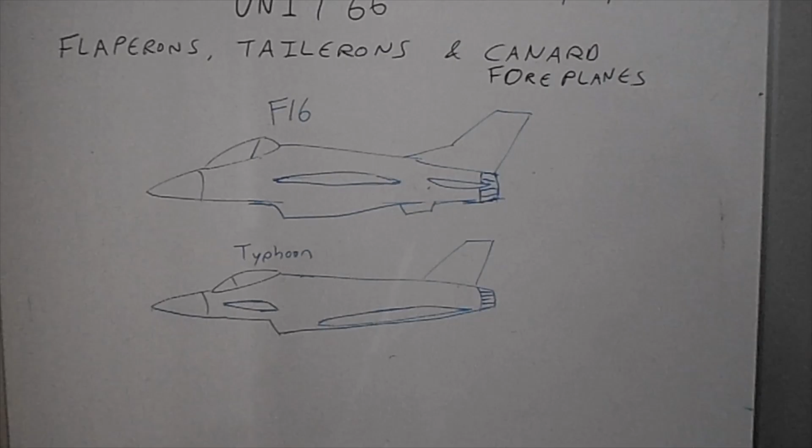Okay, so this is a dedicated lesson on Canards, or Canard foreplanes, as fitted to the Eurofighter Typhoon, the Rafale, the Saab Gripen, the Su-37 Terminator, and the Chinese J-10, and some other aircraft. NASA had a quick go with them on one of the X-planes to see what they'd do for the Advanced Tactical Fighter, but they decided to go without canards and went for vectored thrust instead. The Su-37 has both vectored thrust and canards, but it's a big heavy fighter, so it needs that surface area and extra thrust to turn it around.

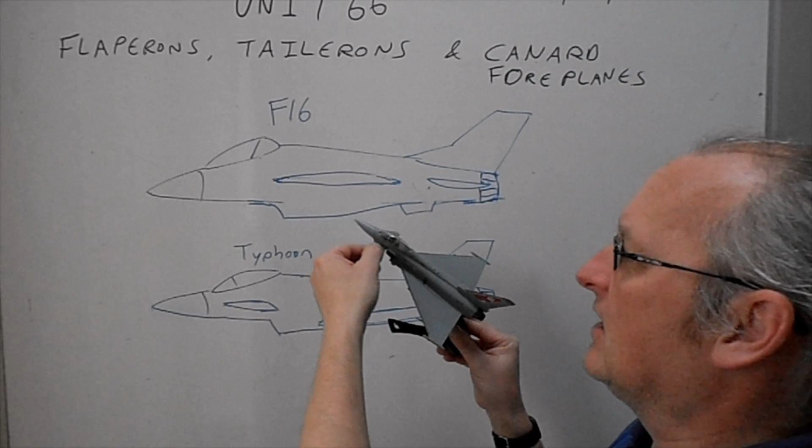Right, so canards, basic introduction to them. The canard is this bit here, which is the foreplane. So you have the main plane and the foreplane. It is a plane in front of the wing, right?

And I'll talk a little bit about the advantages. Your criteria is about the advantages of canards. There's a lot of website activity out there, a lot of YouTube videos. Basically, people that like to talk about jet fighters get a little bit polarized. The American ones are in love with the F-22 and the F-35. They will defend that to the hilt, and stealth's super important and things like that. And then other people are saying, well, it adds extra weight, it's not very dynamic - a Canard Delta configuration is better, and things like that.

So the Eurofighter and the Rafale are seen as being a generation behind the F-22 because they don't have stealth. And those aircraft were designed in the 1980s, before stealth became a widely recognised thing. Stealth isn't the be-all and end-all of everything, and those aircraft are very expensive and can hold their own in a dogfight with any aircraft that has stealth capabilities. Stealth is of limited use, of no use whatsoever in a close-in dogfight because you can see them. I'm not going to go into a big long diatribe about stealth versus canards, because if you could design stealthy aircraft with canards, you would.

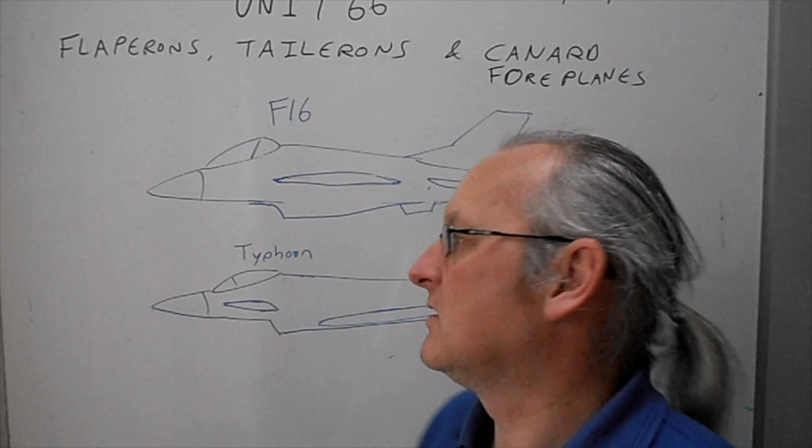Okay, now I'm going to compare two aircraft here: the General Dynamics F-16 and the Eurofighter Typhoon. The F-16 and the Typhoon have your standard configuration. This one has a taileron, but for now we're going to concentrate on the fact that they're both all-moving surfaces. So the canards and the tailerons both move up and down, right? There's not like a little elevator at the back. There was on earlier aircraft that had canards, like the Saab Viggen, okay.

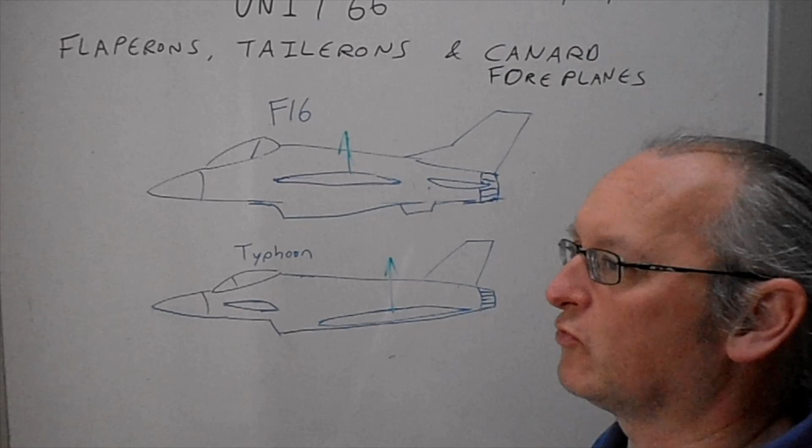The Typhoon has what we call close-coupled canards, more on that later on. But one of the advantages of canards is, if you think about what's happening on the tail, right? So we're going to draw positive in green, so we've got some lift. That lifts the aircraft's weight up. The lift here is coming from the wing. Most of the lift on both these aircraft is coming from the wing. Now, some purists will say that the Typhoon doesn't have loaded canards because it doesn't actually support most of the lift. So pick another aeroplane with canards, doesn't matter which one, we'll talk about that.

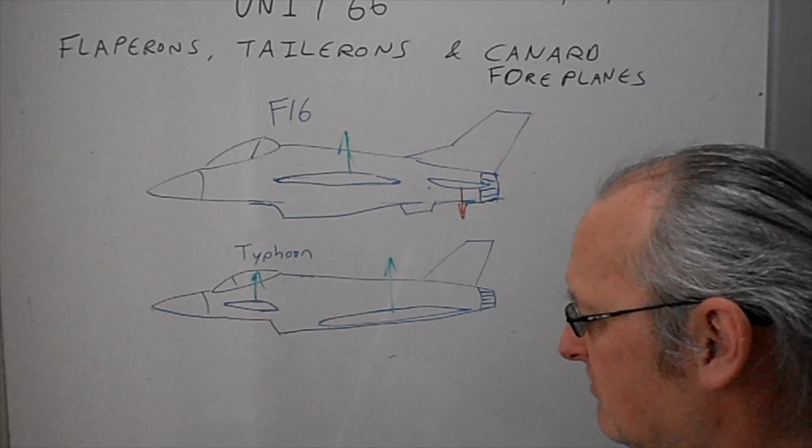So the canard is providing lift in this direction. Now, the taileron, or the tail, is providing downforce in that direction. So the first advantage of canards is that - and remember, in engineering and aerodynamics, you don't get anything for nothing. So I'm going to draw a negative effect here, which is what we've already talked about: if you've got a surface providing lift in any direction, you are producing induced drag.

Okay, you can't get away from it. You can put winglets on, you can do whatever you want, but basically, if you make lift, you make induced drag. So there's a drag penalty for making lift. You've got to make lift.

We're making so much lift, and however much lift you can make is how much weight you can lift. So all of the lifting work here has been done by the wing, and this is just providing a pivot to balance the wing out. On this system, on the Typhoon, everything is being lifted up by the wing, but also the canard is helping to actually lift the weight.

So if you're trying to lift a 20-ton aeroplane, here you've got to create all 20 tons on this, which creates a lot of induced drag. You need all 20 tons here. Here you can split the drag between two - you can create 18 tons here and 2 tons of lift here. You've still got your 20 tons of lift going up. What it means is that the canard, which is creating induced drag at the front, is also providing you some lift, whereas the tail at the back that's creating induced drag is not providing you any lift. So that's one advantage of canards - all the lifting surfaces add towards lifting the weight of the aeroplane up.

Right, other advantages of canards then. Going back to this, we'll just get rid of all that bit there.

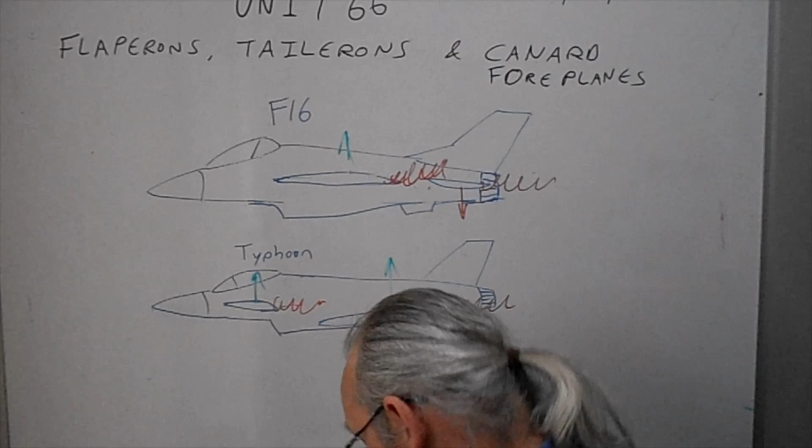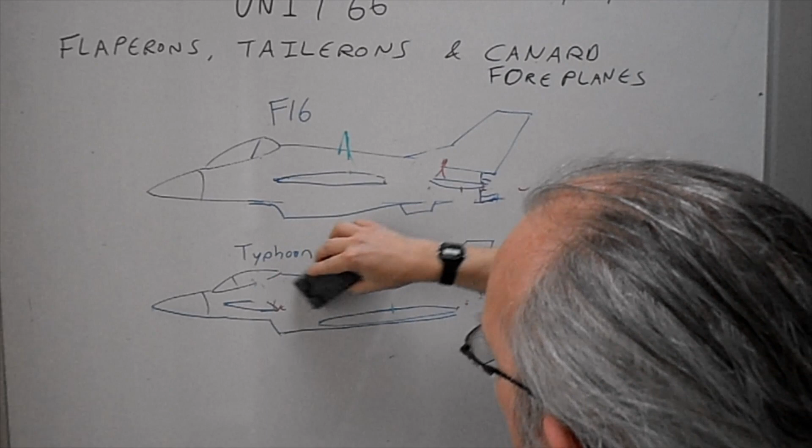Let's look at air combat manoeuvring or dogfighting. So in a dogfight, we've got the Typhoon and we've got the F16. The F16 wants to change direction. There's the back end of your F16, your bogey aeroplane is over here - make it anything you want. So that's the bad guy, and this is the good guy.

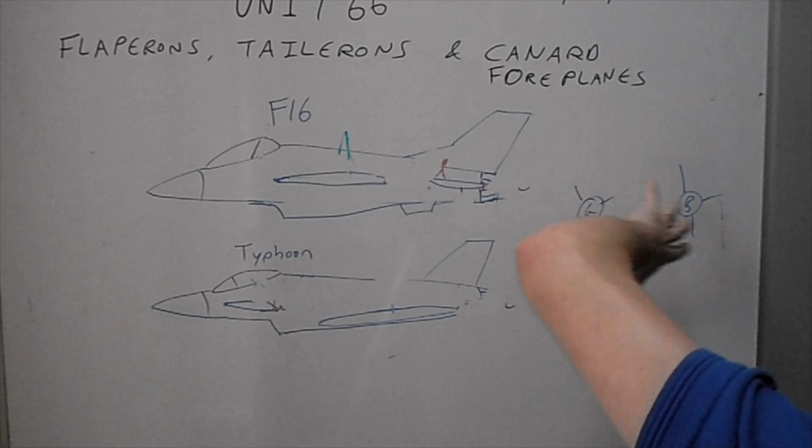He wants to shoot down the bad guy. He has to turn his aeroplane or pitch the aircraft in a turn. It's mainly the tailerons that can do all the work here, pitch the aircraft round in the turn, create extra lift, and get inside that turn - point the nose of his aircraft at the bad guy in order to shoot him down.

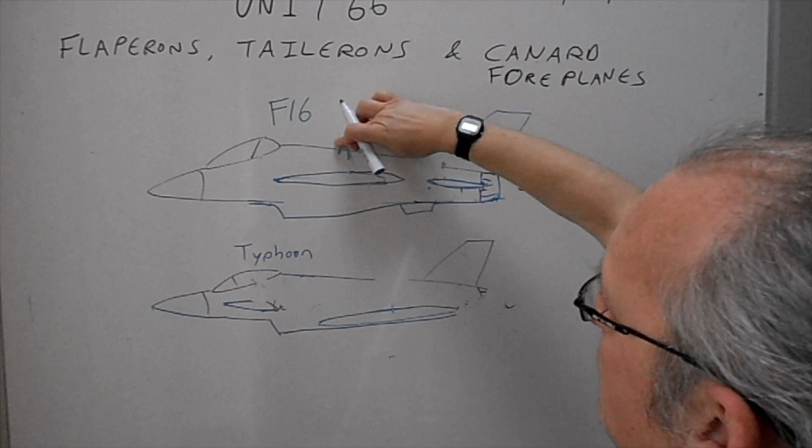With the manoeuvrability effect here, what we have is the wings do most of the turning force. That's creating, remember from our forces in a turn lesson, all the centripetal force to turn the aircraft, pull the aircraft. Centripetal pulls the aircraft into the turn.

What's creating that extra lift is, in order to turn - let's say that guy shoots in front of him really quickly and he goes 'whoa, there he is' and has to react very quickly. What's got to happen is the F16 taileron has to go up into that position. It then has to create more downforce. Once it creates more downforce, the wing angle of attack increases, which creates more lift, which pulls it into the turn. So in order for the aircraft to pitch, the tail has to go down, then the nose has to go up.

The Typhoon, basically, all it's got to do is put its canards in that configuration. That creates an up force, and the nose is directly controlled to go straight up. There's no dropping of the tail. So instead of the tail going down and skidding round to try and get the nose pointing that way, the Typhoon just points the nose that way.

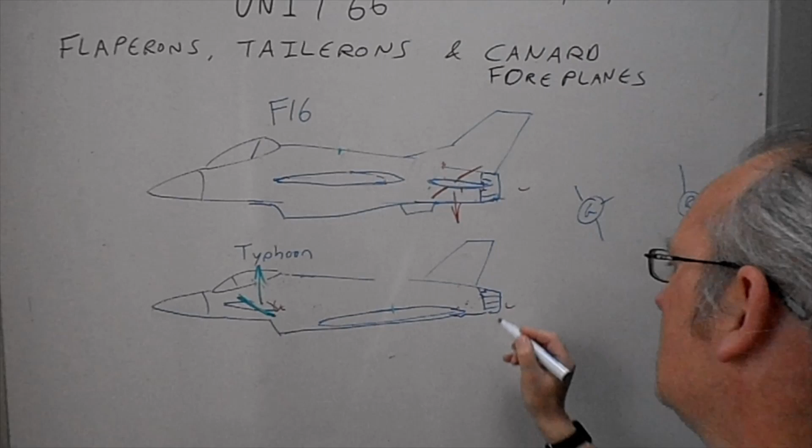And the way the aircraft is balanced, because it's got artificial stability - we talked about the Typhoon, the Rafale and the Gripen - if we turn the computers off, the thing will fall out of the sky, because it is not actually a stable platform. So when it goes like that, it turns immediately, and there's not a lot of weight on these canards. The canards aren't actually producing a lot of lift, so as soon as they turn like that, immediately the aircraft will turn onto the target.

So that's one advantage of canards. The first advantage is they all can be used to lift a little bit more weight, without the drag penalty of a standard tail. The next advantage is that they can produce an immediate response to a turning force, so they can immediately respond.

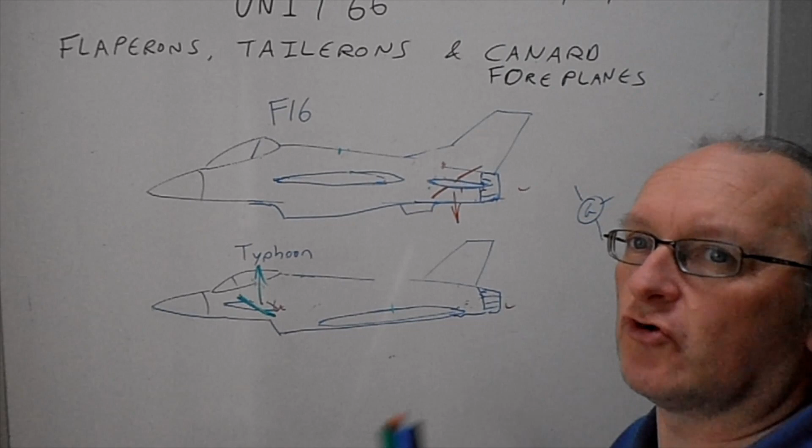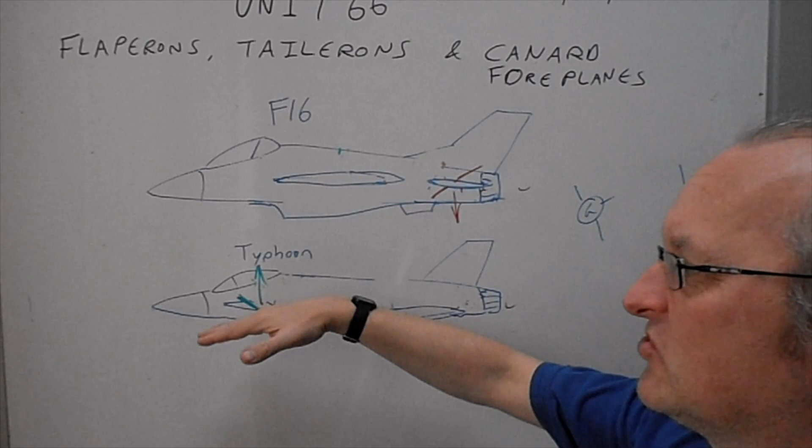Okay, they're at the front. Basically what canards do to aircraft is, if you think of a shopping trolley with all the wheels lined up, it's quite hard to turn. You know the dodgy shopping trolleys that won't go in a straight line? That's like a Typhoon, really. It's always trying to flick out of line. Then as soon as you initiate the canards, it wants to move. So it makes it very unstable, which makes it very, very good in dogfights because it can respond very quickly.

Typhoon, Rafale, whatever's got canards. I'm not going to go into vector thrust at the back, which is what the Russians and the Americans have gone through, because that's not in the criteria. I'd love to spend time talking about that, but I'll have to stick to what the syllabus is for now. So, Typhoon, immediate response.

Other advantages of canards then. So what we've got is, in that, just checking I'm following my lesson plan here. I have to go back to long coupled canards in a minute. So we'll forget the F16 for now, we'll enjoy another aeroplane. I'll find out how much time I've got left. Okay, got another 5 minutes on that.

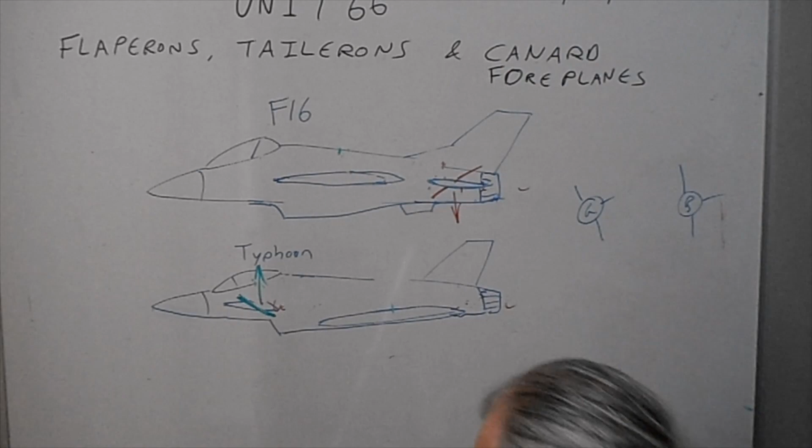Now we're going to talk about long coupled and short coupled canards.

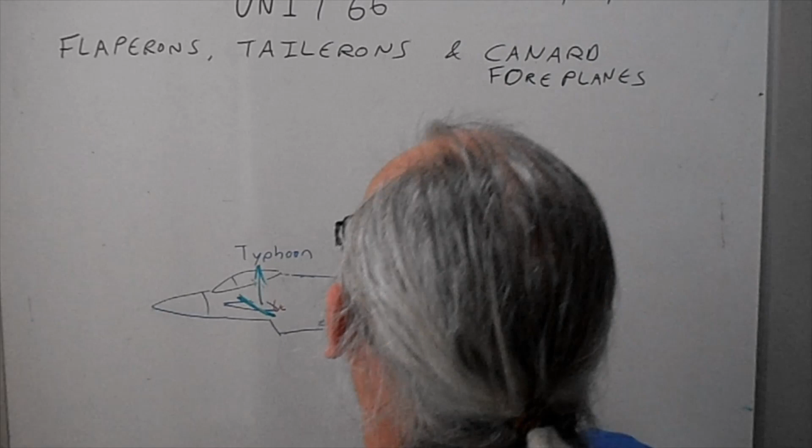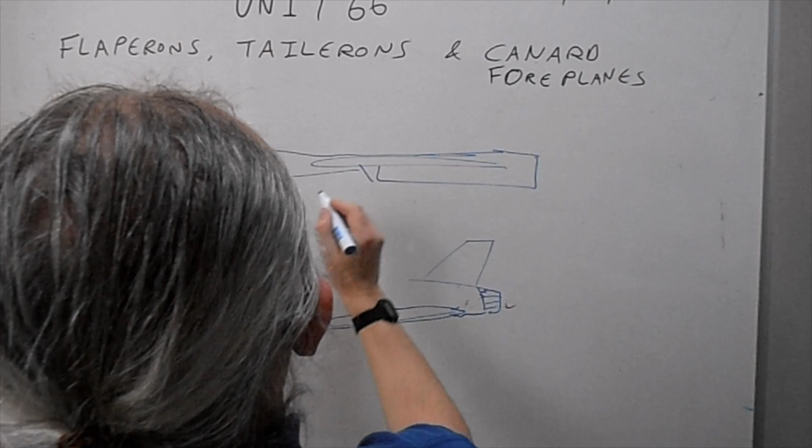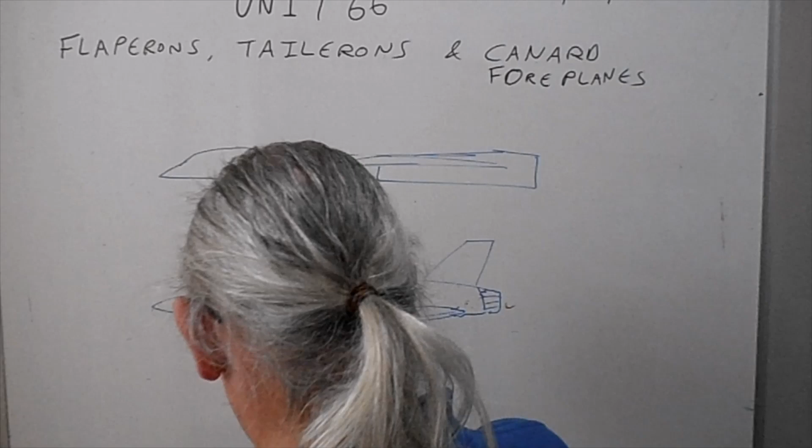So we had a thing called, I can't even remember how this thing, it's a big Delta aircraft like that. It's got the engines underneath, engines like that, and a cockpit there, and it goes like that. I think it looks a bit like that, and about here we'll have some canards. Now I haven't really drawn that too well, so I'm just going to shorten that wing. The wing's back here. This thing is the XB-70 Valkyrie, which was an American experimental bomber that actually achieved a speed of Mach 3.

So it was nearly as fast as a Blackbird. It didn't go into production because it wasn't really required, because as soon as they developed this to go Mach 3, the Russians developed missiles that could go Mach 4 and a bit. So it was kind of obsolete before it went into production, but it was a really fantastic design and it did a really good job.

It had what we call long coupled canards. Long coupled canards are far away from the wing. The reason you used to have these, before fly-by-wire, is that on the back end of a wing we've got a downforce, a downwash at the back of the wing. Remember, we talked about that, the Coandă Effect. We didn't spend a lot of time on that in class.

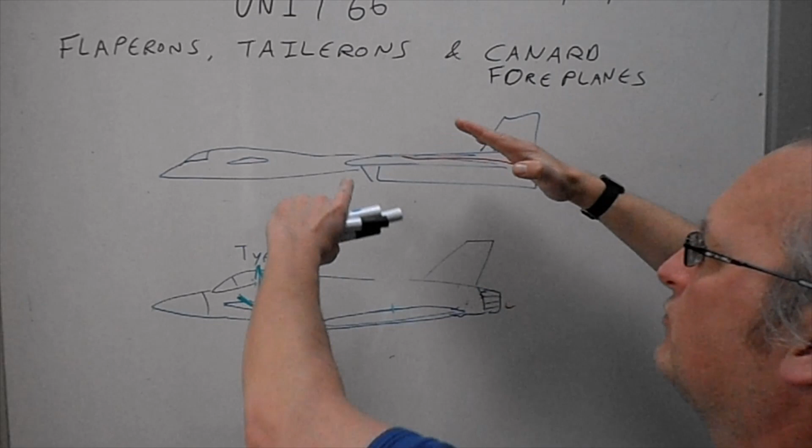I don't even think I mentioned the word Coandă Effect because I don't want to disturb people from how lift works. We talked about Bernoulli over the top and Newton at the bottom - this is a bit of Bernoulli and Newton stuff together. There's the Kutta Effect - is it the Kutta Effect? And the Coandă Effect, which we did show in the wind tunnel. We showed air in the boundary layer sticking to the top surface of the wing and continuing to divert once it had gone past the wing. If you remember, we saw the smoke bend. Even though it had gone past the wing, it was still bending - that's the Coandă Effect, or part of it. And you get this downwash after a wing.

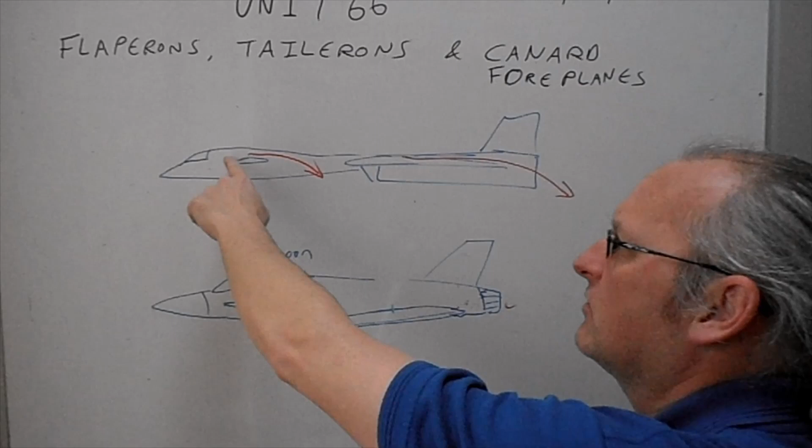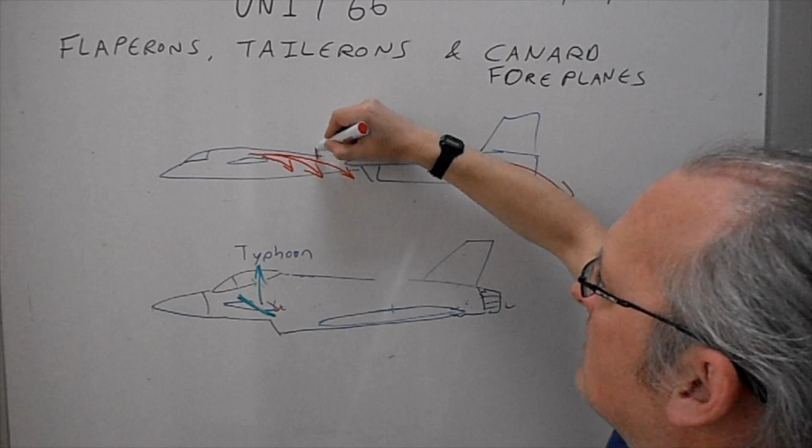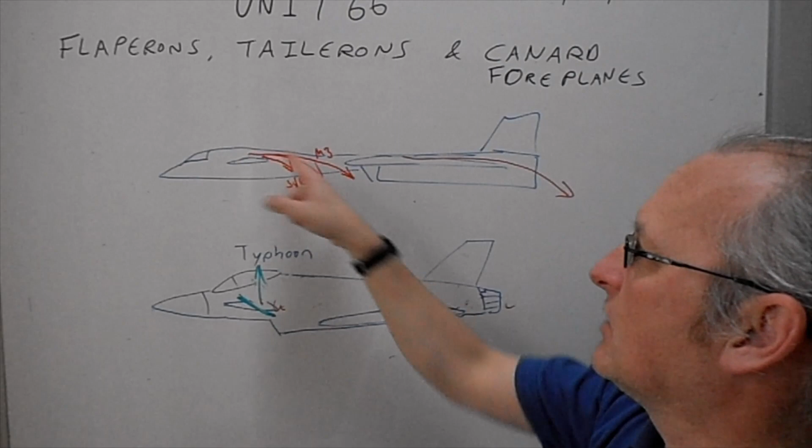So if that's going to have downwash and it's creating lift, then this is going to have downwash too. The reason you used to have long coupled canards was that this downwash eventually becomes a little bit turbulent, and this downwash was mucking about with how the wing generated lift. So you had to have your canards far enough forward, even at extreme speeds such as Mach 3. Can you imagine at Mach 3 how this is going to touch that? At subsonic speeds, the downwash is in this direction, but at Mach 3 it's just missing. At normal speeds, you've got it here; at Mach 3, it's just missing the front of the main wing - so that this downwash effect isn't mucking about with the effect on the main wing.

And even on the Valkyrie it did a little bit. So then they realised that was a problem.

Why did the Valkyrie have canards then? Why not just get rid of them?

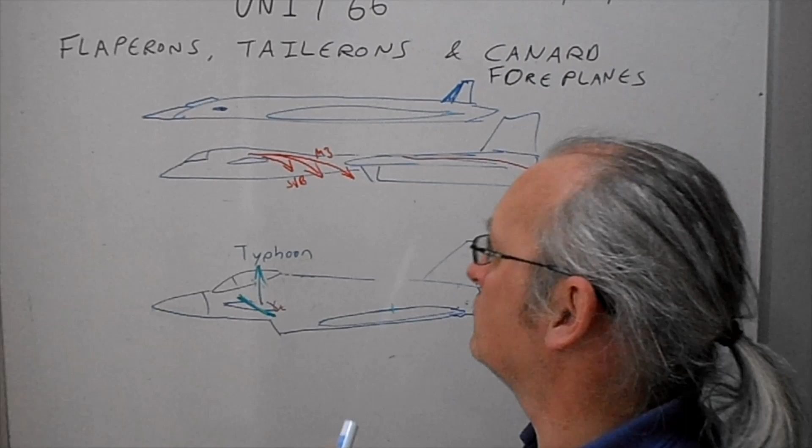The problem is with a long fuselage like this. If we superimpose Concorde on that, there's Concorde with its big tail. Concorde is a pure delta, very pointy, with a huge wing, and Concorde right at the front. If we extend Concorde out a little bit, right at the front Concorde has what you call strakes, which are just fixed, very small canards. If I draw the nose of Concorde, this is how small they are.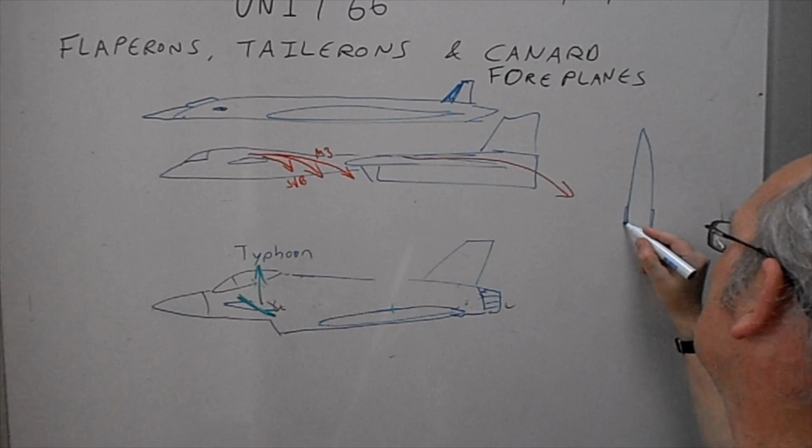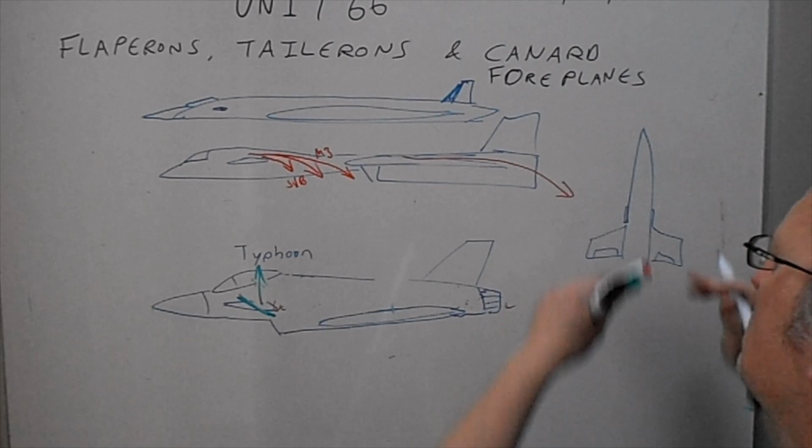They're only tiny. Now the Russians couldn't quite get this right. What the Russians had were big retractable canards that on takeoff and landing popped out, not quite that big, with control surfaces on them. They flipped out from the fuselage to give it extra pitch control on landing and things.

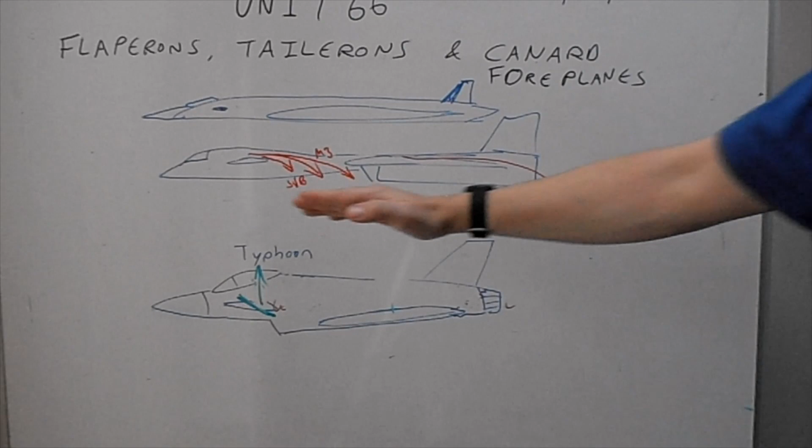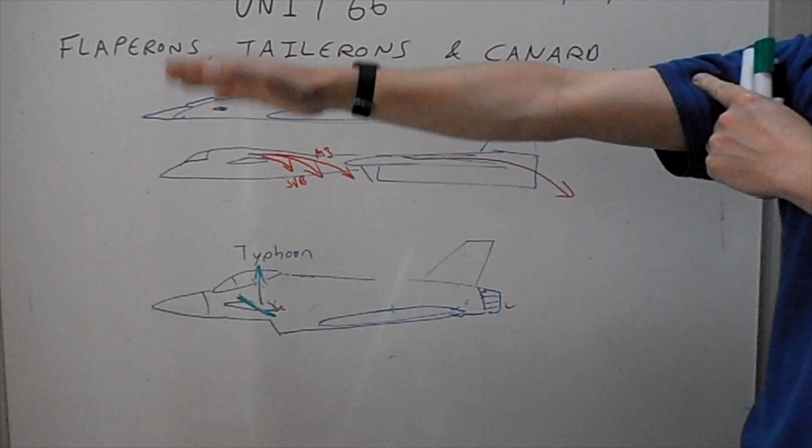So these are long coupled canards. Now what long coupled canards are there for, if you think about it: you've got a fuselage on Concorde, it's made of metal, and what it's doing is wobbling around. If you make a structure of metal that's supported here and isn't supported there at all, apart from air, it's going to do that a bit, isn't it? It's going to oscillate, it's going to wobble about a bit.

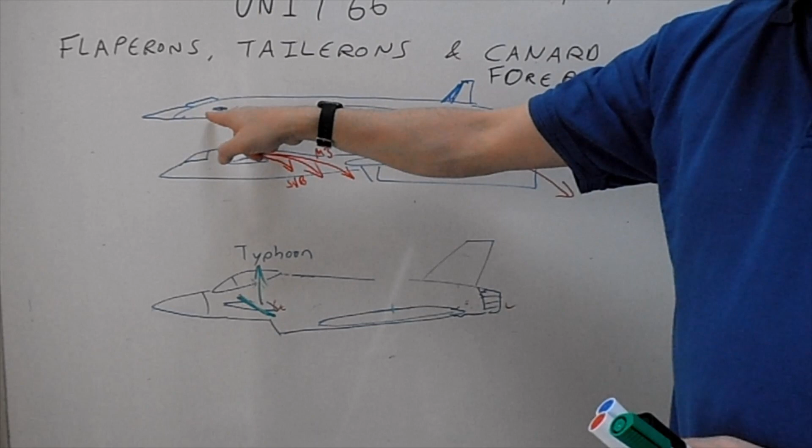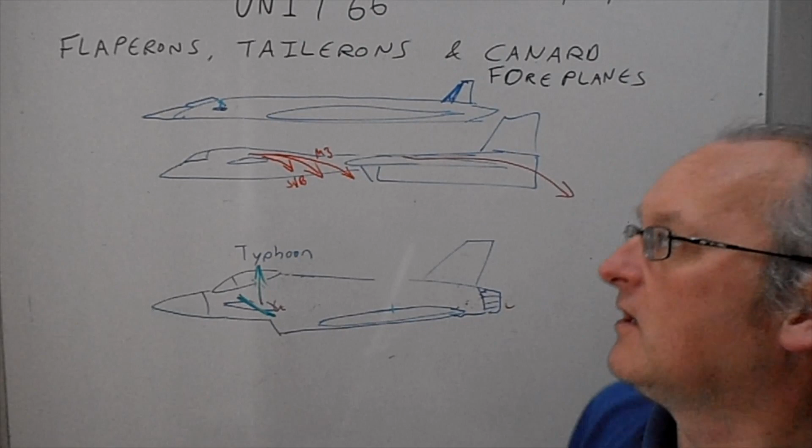Even if you get your bits of aluminium in the workshop and flex them a little bit, they're going to wobble. So what they decided to do was put these little things on here, and this acts just like a little support on a bridge. There's airflow going over it, creating a little bit of lift, sitting more like a fin really, and it's holding that fuselage in a straight line. Whether it does that or not, you can debate, ask whoever designed Concorde, but that's my best guess why that thing is there.

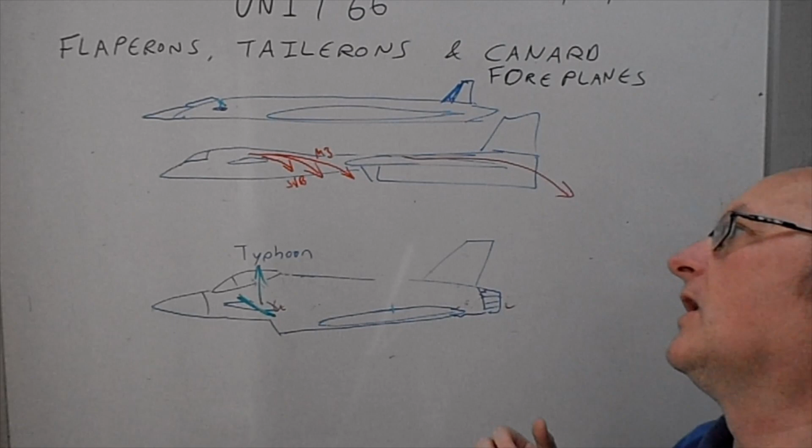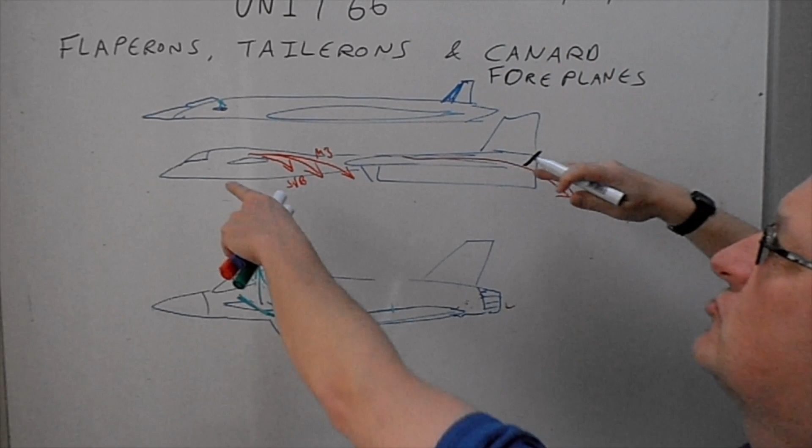So long coupled canards are there to give some pitch control and to give some stability to a long structure of a fuselage. In order to turn that whole big large aeroplane, the XB-70, from some elevons back here, you're trying to move this bit of metal here from this bit of metal here, and there's a lot of stretch and flex in that fuselage. So if we have some control up there, that gives you control. That's long coupled canards.

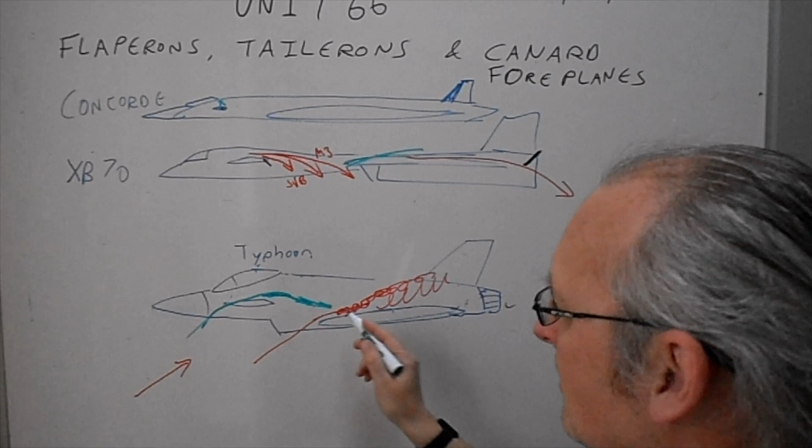Right, a couple of things that canards can do. So one thing a canard can do is, remember this Coandă Effect? The airflow over the canard, because it's at a slightly different angle, is deflecting down over. At certain speeds what it can do is that airflow of the canard at high angles of attack can be angled using the fly-by-wire to re-energize and give it a bit more, because what's happening here is the air's losing a little bit of velocity and it's becoming turbulent. If you then blow some laminar type organized layers of air onto it, it can keep it in layers for a little bit longer. Maybe it's only that much, maybe it's even less than that, but in a dogfight that gives you a little bit of an advantage.

So your F16 pilot, your MiG-29 pilot, their wing has stalled, there's nothing they can do, they are falling out of the sky. The only way to fix that is to increase your thrust, point towards the ground, get your speed back over the wing. Once you've got your airflow back over the wing, you get your nice laminar flow, and then you continue dogfighting. The Typhoon pilot might give it an extra tiny little bit of an angular advantage on that, a little bit more angle of attack before the wing stalls. So that is the airflow over the canard being used to re-energize the flow over the top surface of the main wing for a very, very small part of the flight envelope, but it gives it a tiny advantage.

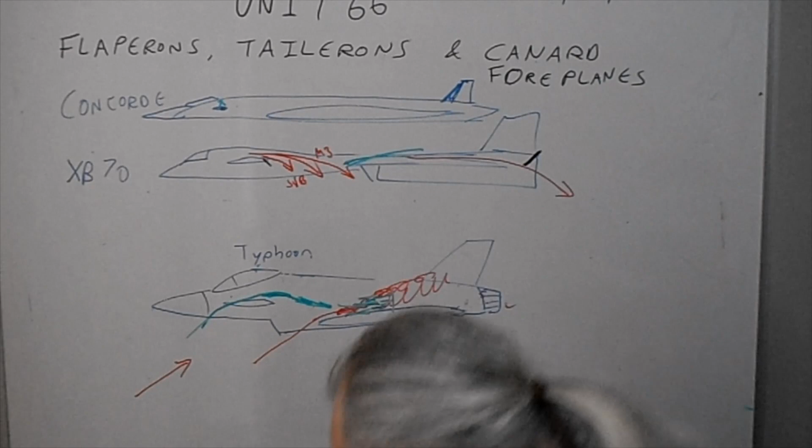Okay, right, now this only works with close coupled canards. Now what we've said before about close coupled canards, this effect here, at subsonic speeds and some other types of speeds and in certain flight envelopes, at certain speeds this becomes a problem, because this air here is trying to be laminar and trying to maintain lift, and it's trying to stay laminar, and then this thing's actually hitting it and making it turbulent, or messing around with it, or just basically ruining the efficiency of that wing.

So what you can do with fly-by-wire is, if you know what those angles are, you can put in a very, very clever computer algorithm, and you can decide to sort of adjust that canard. If that's not producing any lift and it's just there for control, you can put it at a slightly different angle so that it doesn't do that. You just design that out using software.

Okay, now I'm not going to go into exactly how the Typhoon designed that in. I know that both of those things happen, and I wouldn't like to stand on YouTube and say, oh, they definitely designed this or they definitely did that, because I didn't design the Rafale or the Typhoon or whatever. But that's what's possible with close coupled canards and fly-by-wire.

I've already mentioned in class that the Chinese J10 has a big massive ventral stabilizer at the bottom. Now if that had very, very clever fly-by-wire, you could do without that by adjusting this rudder millions of times a second. That tells me that the J10 possibly doesn't have as clever software or as fast software as the Typhoon does. And I know that the Typhoon has fibre optic cables to enable the software to move the flappy things faster. Yeah, that's what you need. That's the level of speed you need for this type of thing to happen.

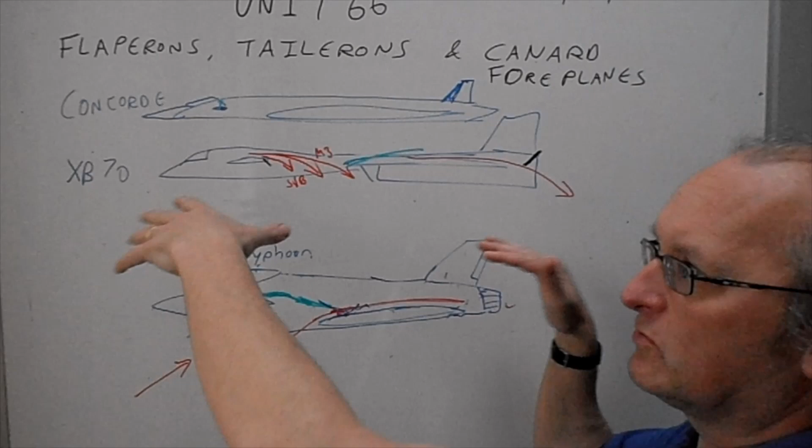Right, okay, back to this. So the advantage of canards is you can carry more, you can use them to carry weight. There's a negligible trim drag penalty with them because they're producing lift all the time, not downforce, so that helps. So you're getting something for something rather than something for nothing like conventional tails.

At high angles of attack, you can modify the airflow over the Canard to re-energize the flow over the main wing, delaying a stall for a little bit longer. So it'll stall at a slightly higher angle or a slightly slower speed, which gives you an advantage in dogfights where everyone's trying to slow down and get behind each other.

Right, okay, see how much recording time I've got left on the video. Yeah, we're okay with that.

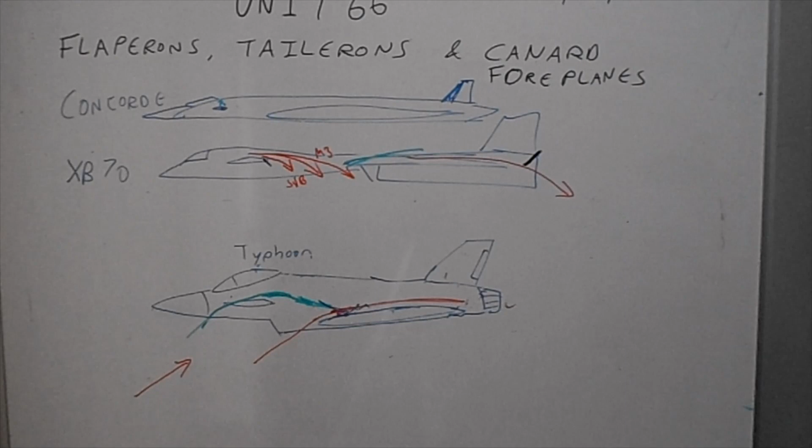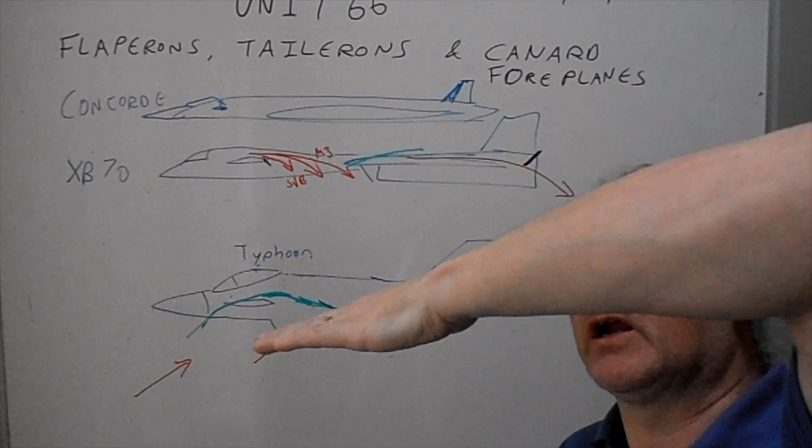Right, so this bit here, I forgot to mention, it's got its immediate response. Because it's at the front, it's like a wobbly shopping trolley, and as soon as you pitch it, it immediately flicks up like that. Last thing about Canards: mentioned re-energizing the flow, immediate response. There's something I've forgotten and it'll come to us in about 2 seconds.

Right, so the last advantage is the Canard can be designed to stall before the main wing. Now, in certain computer games and in real aircraft, you get a stall warning. So when the aircraft's about to stall, you'll get a stall warning, in the middle of a dogfight, in the middle of air combat.

Now, I haven't had a chance to speak to a Typhoon pilot because I started teaching this after I was involved with them. So I haven't had a chance to talk to them yet. I keep meaning to get around to it.

If the Canard is designed to stall before the main wing, that gives you a slight advantage. That means when you're pulling back on the stick mid dogfight, you're pulling 9G, and you're trying to not get killed or to launch missiles at the enemy. You might be avoiding someone trying to shoot you down while trying to shoot somebody else down. It's very chaotic. There's a lot going on, and you're pulling 9Gs.

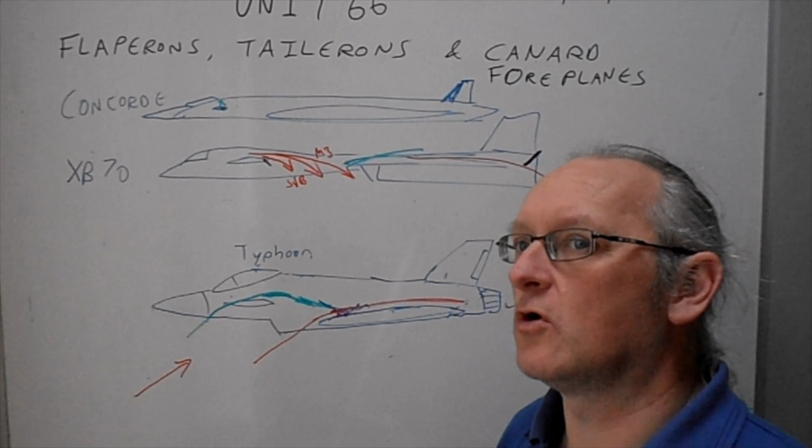Okay, so basically, it's a really, really bad time for you. What you don't have to think about is, am I going to stall? What the Canard does is it gives you kind of an automatic limit, because when you're pulling back on the stick, the thing that's pulling you into the turn is the Canard. So I'm just going to wipe this off for now.

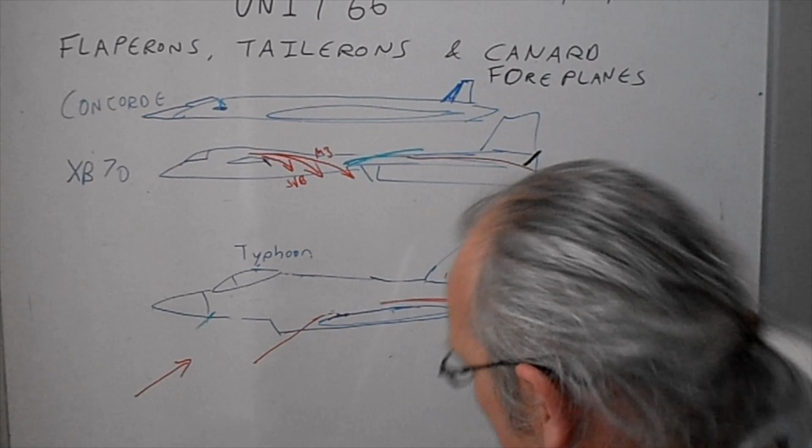So the thing that's pulling you into that turn, we've still got the laminar flow over here. And your Canard, if it's going to pull you into the turn, it's going to be in this sort of configuration here, pointing up. So as you can see, it's already got a very, very high angle of attack compared to the actual wing. The Canard's small and it's a slightly different shape, but at a certain point that Canard is going to give up.

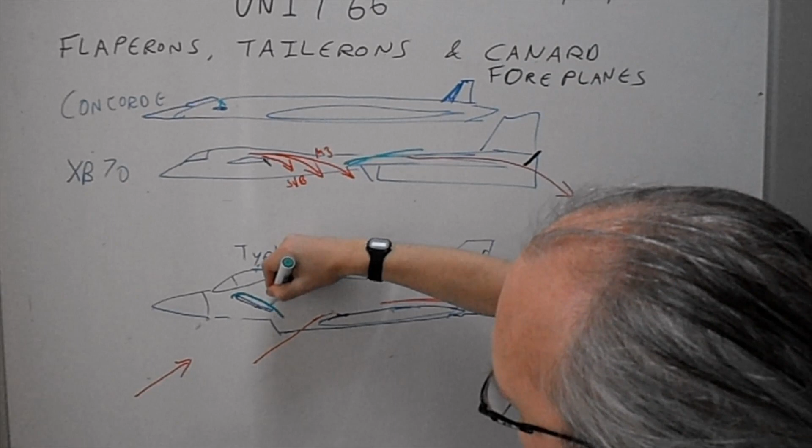You're not going to get this downward effect anymore, this is going to become turbulent, and you're going to lose lift over the Canard. What's pulling you into the turn? The Canard. As soon as the Canard stalls, you can't pull into the turn anymore, so it actually lessens your turn. So it gives you a sort of ultimate limit to that turn, so you cannot stall it, right? If you do it violently enough, you can still stall a Typhoon. I'm not saying you can't stall a Typhoon or a Rafale.

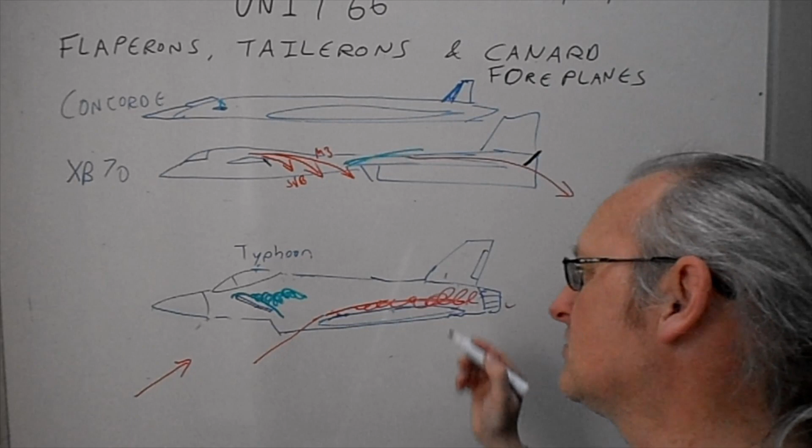What I'm saying is, the Canard's pulling the turn, you get the turbulent air on the back of it, you get the turbulent air in the Canard before you get full turbulent air over the wing. So the wing still has a lot of laminar flow going on. Might have a little bit of turbulence back here because the airflow isn't sticking to the wing as well. But you're not fully stalled on this wing when your Canard stalls.

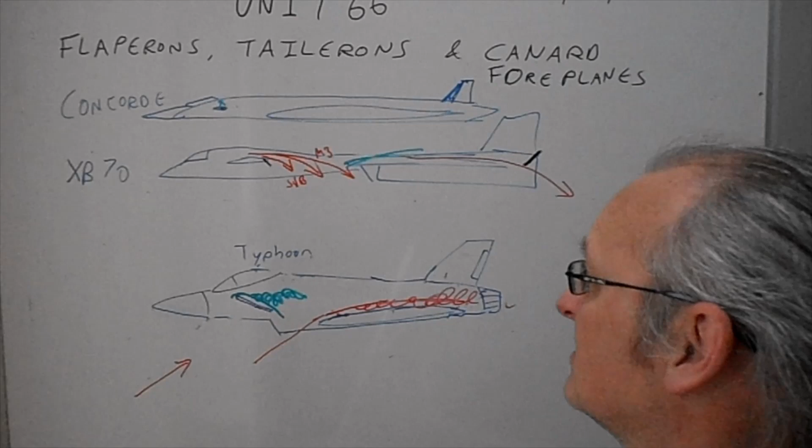Right, going back to an F16 or MiG-29 or whatever aircraft with the standard tail configuration. Okay, so we'll just change one of these to a standard tail.

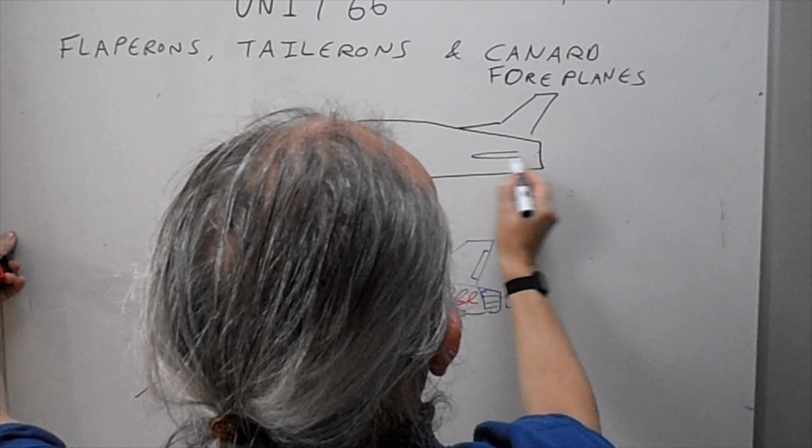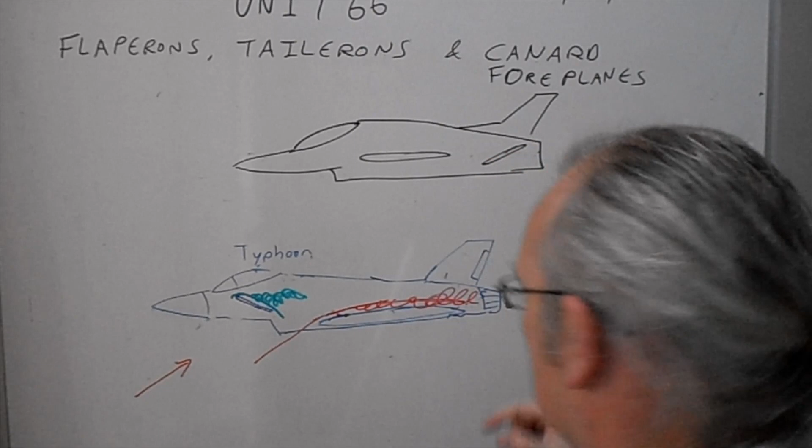Not that I'm having a pop at the F-16, it's a very, very fine airplane, does the job, and it's a really good dogfighter. I wouldn't like to go up against one in a dogfight. But here we go. So this wing here is, remember, doing all the work. Your F-16, your taileron. Now, this does have a little bit of advantage as well. As you see on this one, the taileron is at a lower angle of attack. So the wing is going to stall before the tail.

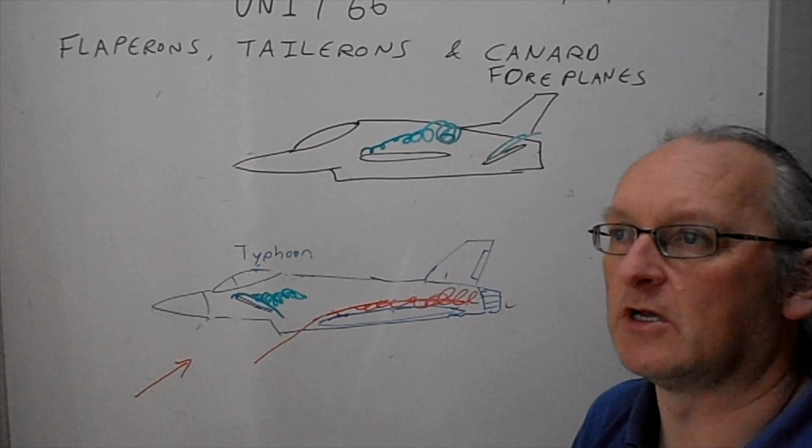Now this gives you more control. When you actually stall, you can put the taileron the other way and you can back off a little bit. But the pilot has to react to do that. He has to let off on the stick. With this one, the pilot cannot pull that aircraft any more into the turn, because, well, it can, because remember on the Canard, you have the flaperons at the back.

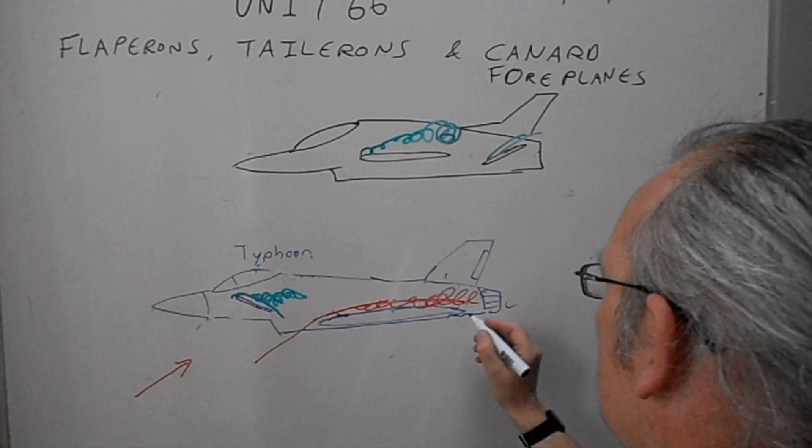So the Canard will be in that position, the flaperons will be in that position, and they will be producing some deflected air up there, which is going to produce some downforce there. So it's going to do the same job as that. It's another advantage of the Canard if you couple it with flaperons. The flaperons in pitch on the F-16 are not doing anything. They're just in the standard configuration there. So all of the pitching is being done by the taileron.

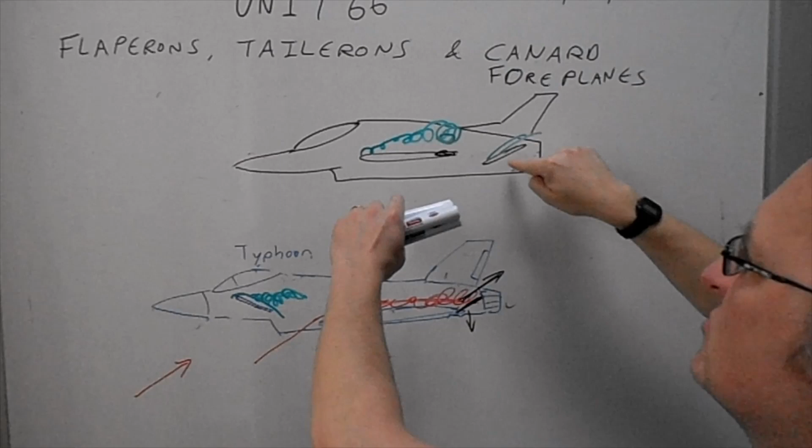So with the Typhoon, you've still got control at the back. You cannot stall. You can still pull into the turn a bit more using the tailerons and the flaperons if you want to. The F-16 is in the stall. This hasn't stalled yet, but the wing has stalled. This is going to fall out of the sky if the pilot doesn't do something.

The Typhoon, the pilot's pulling back on the stick, the Canard stalled, it's not letting them go any further into that turn, so it's kind of not an artificial, but a limit to the turn that the pilot doesn't have to think about. She knows she's pulling as hard as she can in that turn. If the target's not there, you can't pull any harder. It's going to be impossible to get that angle. They're going to have to try something else. Whereas the F-16 can pull into the turn, pull into the turn, and all of a sudden stall warning, the wing stalled, you've got to disengage from that turn.

Is it an advantage? Is it not an advantage? I'd be interested to hear from some pilots. I'm not interested in hearing from F-16 pilots that love their aeroplanes and are just going to defend them to the hilt. I'm not interested in listening to Typhoon pilots that love their aeroplanes and will defend them to the hilt. That's my kind of theory on it. It might be wrong, but that's how I understand it.

It gives you a slight advantage, and it is only slight, because we're talking about maybe 1 degree in angle of attack or something, that half a second kind of extra thing. So just to boil all that down: at high angles of attack, the Canard can be designed to stall before the main wing, which gives you a slight advantage. It's an advantage of Canards.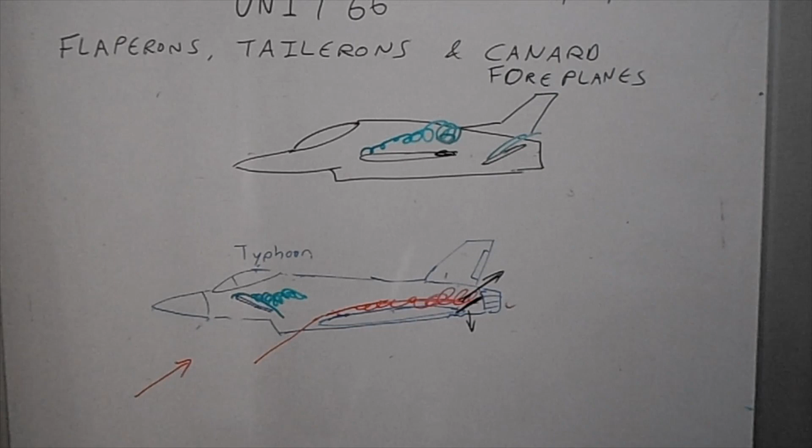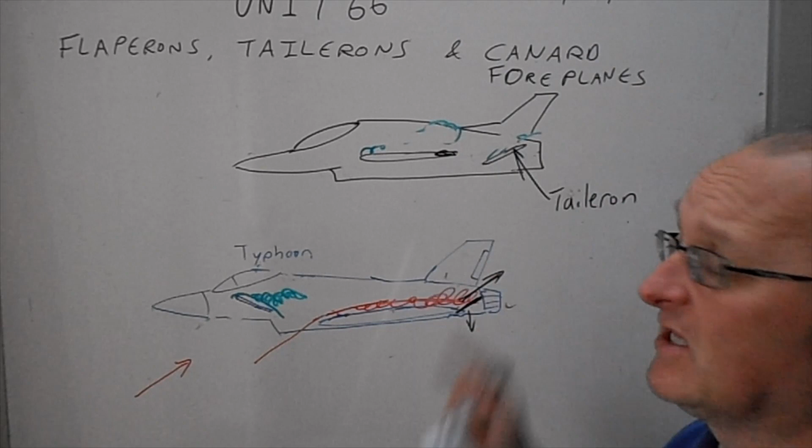And please don't just, I will not be marking things where I get a picture, there's nothing on there, right. You're not going to get a merit criteria for telling us where a taileron is and that it's a taileron. I need to know the advantages and how it works. Same with the canard. Okay, so by all means tell me what canards and tailerons are as an introduction, and then show me a picture of an aircraft and say this is a taileron, this is a canard, and you can do everything else written down.

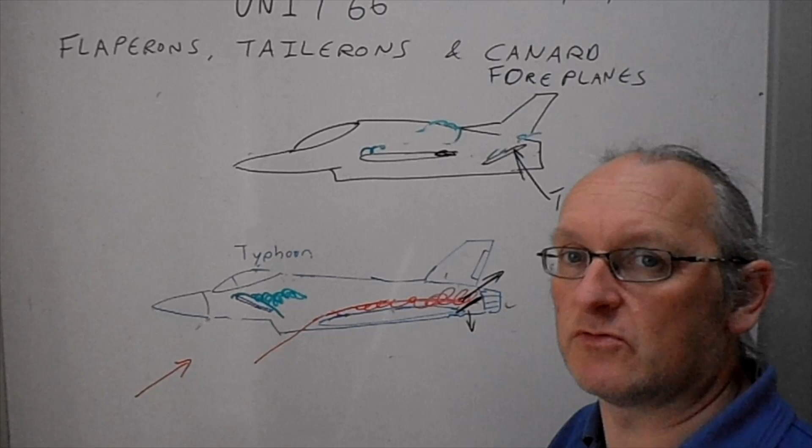Yeah, but you've seen how many drawings I've had to draw to explain it to you. Think about merit point 1, where people just handed in written explanations without the drawings, and it wasn't up to the standard. Okay, so if you're going for merit point 3, we need drawings, we need written explanations coupled together so that you can give a full understanding that you know what you're talking about. Okay, right, that is the whole.